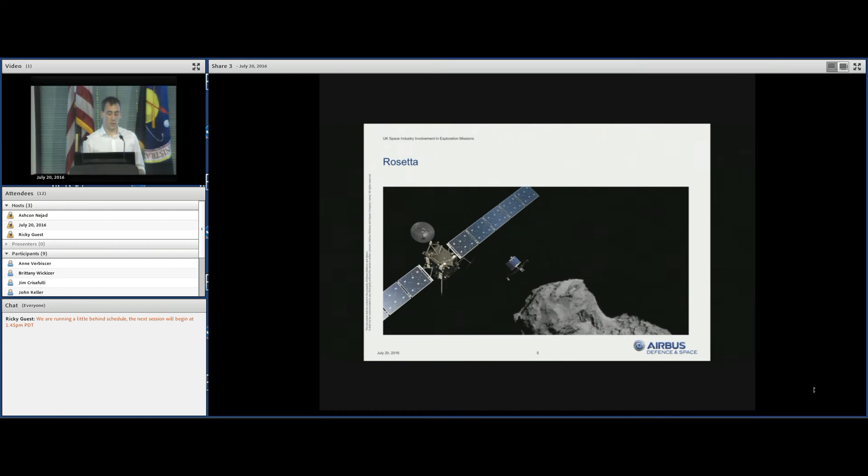So looking at the past, which I define as the things that are kind of currently in orbit at the minute, the UK had some involvement in the Rosetta mission, so we provided the propulsion structure and thermal subsystems for that. We also provided similar elements to the Venus Express mission and the Mars Express mission.

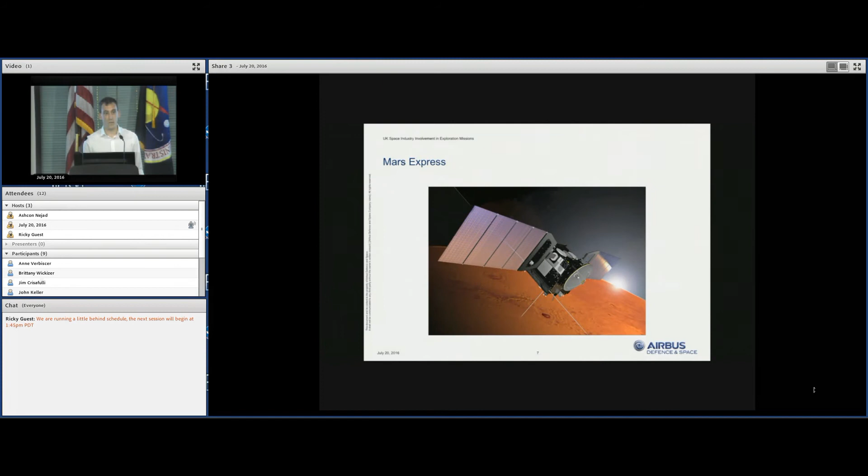For Mars Express, we also provided the Beagle 2 lander. Ultimately, this lander was unsuccessful. One of the solar panels didn't deploy, so it couldn't transmit back to the orbiting spacecraft. But what it did allow the UK to do was to learn a lot about the Martian surface and the Martian atmosphere.

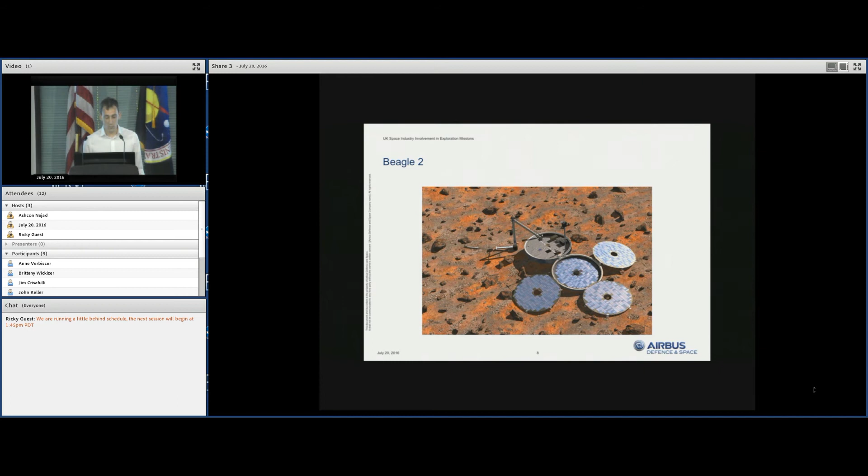So now moving on to the present, so things that are kind of in development at the minute. With all the information and knowledge that we gained from Beagle 2, we applied that in the UK, and that allowed us to take a really leading role in the development of the ExoMars rover vehicle.

So Airbus DS UK is the prime contractor for this. ExoMars itself is a two-mission program that's a collaboration between ESA and Russia. There's an orbiter and a descent demonstrator that's going to arrive at Mars in October. They've already been launched. And the rover vehicle will launch in 2020, arrive at Mars in 2021.

Its mission is to search for biomarkers beneath the Martian surface. And to do that, it's going to have a 321 Sol nominal mission. And it'll have quite a sophisticated autonomous navigation system on board it that's going to allow it to traverse up to 100 meters per Sol and give it over that 321 Sol mission about 4 kilometers total travel.

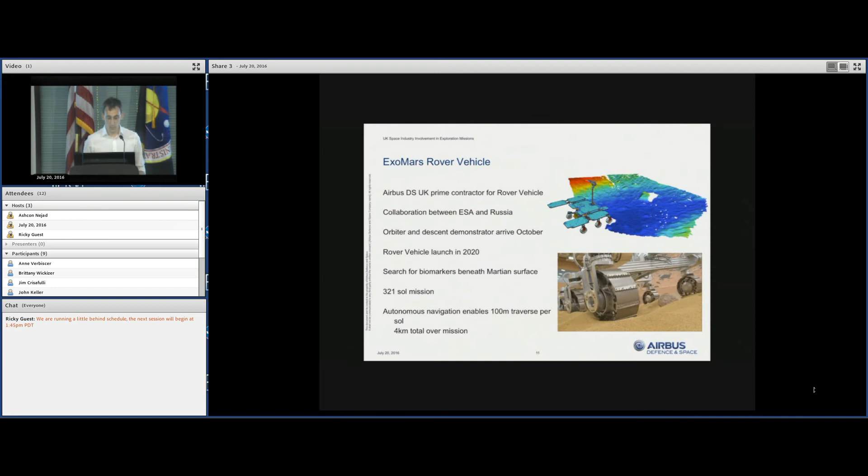In terms of the payload, it's going to carry a drill so that it can collect samples from up to 2 meters below the surface, and there'll be a variety of external payloads that will allow it to identify suitable sampling locations and then characterize those before we take the samples. And then there's also going to be quite a sophisticated onboard sample analysis package as well.

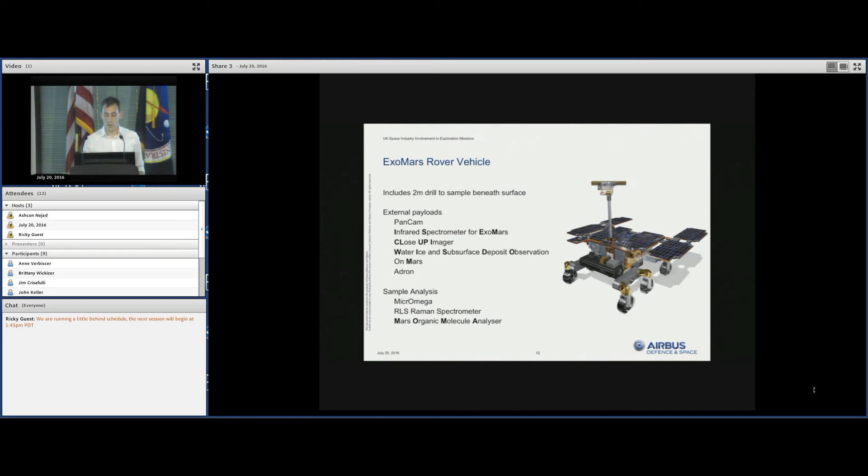We're also involved in ProSPA, which James talked about earlier on a little bit. So this is one of the ESA contributions to the Russian Luna Resurs mission, going to launch in 2021 to the Lunar South Pole region.

There's going to be samples collected, again, by a drill, and then ProSPA is the sample analysis package for that. It's taken quite a lot of heritage from the Philae lander. And the development of this is led from the UK again by the Open University, but with contributions coming from RAL, also in the UK, and Airbus DS UK.

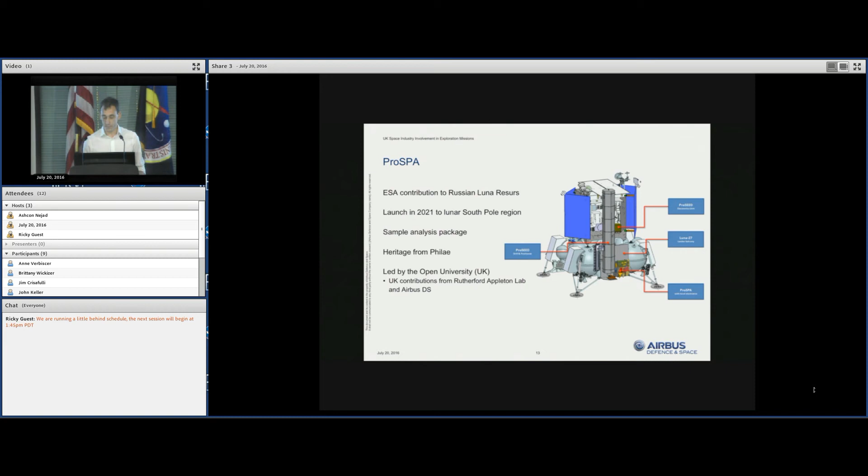Now looking further towards the future, but sticking initially with the lunar theme. This is another thing that James spoke about in his presentation earlier, the Lunar Volatiles Prospector mission, which we've studied again in the UK.

This is a rover vehicle going to explore the permanently shaded regions of the lunar South Pole. It'll have a 1 to 2 year mission lifetime, and periodically it will traverse into these permanently shaded regions, spend about 8 hours in darkness at a time, collect samples from between 0.5 meter and 1 meter depth, and analyze them with an onboard sample analysis package. It'll also collect samples from slightly deeper when not in the permanently shaded regions, and do more sophisticated analysis with the additional power.

This rover is planned to be teleoperated from Earth. James touched on this previously, but we also performed some tests involving Tim Peake on teleoperation of Martian rovers, applicable to other rovers on the Moon too, in our Mars yard in Stevenage.

We've also performed quite a number of other field trials involving rovers. Under the SAFER program, we took one of our rover platforms out to the Atacama Desert in Chile and performed a mock Mars mission, roving around the surface, identifying locations to sample, acquiring a sample in inverted commas, and then analyzing it. The rover was out in Chile, but the operations were performed in Oxford in the UK.

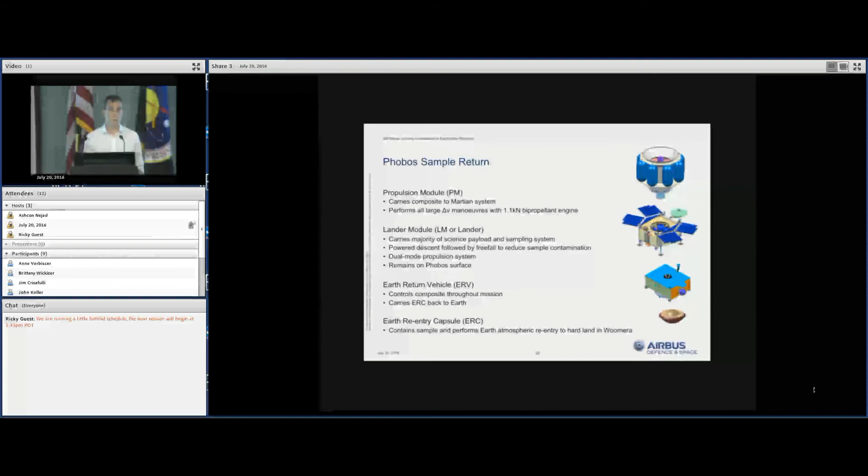The mission consists of a 4-module spacecraft. The first module would be a propulsion module, which would carry us all the way to Phobos, with a European 1.1 kilonewton thrust bipropellant engine on board that would perform all the large delta V maneuvers. We'd then have a lander module on top of that that would carry the majority of the science payload and also the sampling system.

It would perform a powered descent down to the surface before a free fall of around 50 meters to limit the contamination.

Once we've acquired the sample, this would remain on the Phobos surface. The Earth return vehicle would sit on top of this, and this is where the real intelligence of the mission lies. This is the thing that would control the composite throughout the mission, and it would carry the Earth re-entry capsule all the way back to Earth after it's ascended from the surface. The Earth re-entry capsule then does pretty much what it says on the tin, contains the sample inside it, and allows it to re-enter the atmosphere before a hard landing in Woomera, Australia.

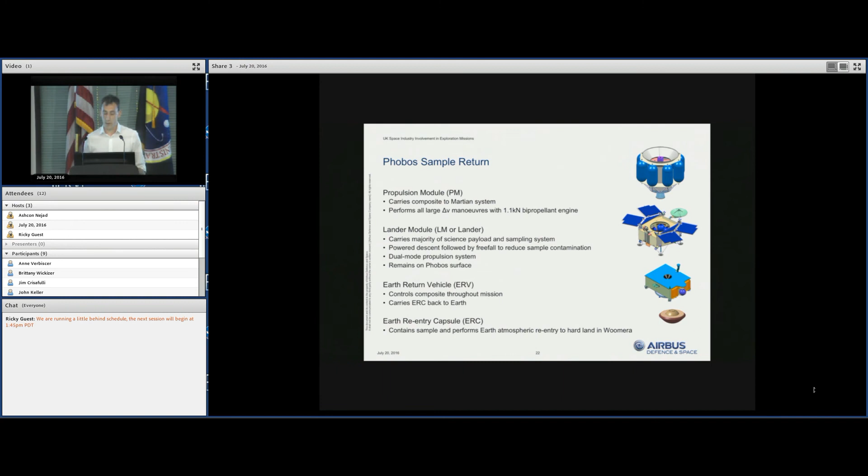In support of the Phobos Sample Return Project, we've got a number of technology development activities underway in Europe that the UK is heavily involved in.

The first of those is the development of the landing gear system. It's a really crucial subsystem for the mission, as it's got to ensure the safety of the mission, both during the touchdown phases and during the on-surface sampling activity phases. It's being led by Sener, a company in Spain, but Airbus DS UK is providing some system-level support to that activity as well. Phase 1 is currently underway, where we're designing and simulating the landing gear, and Phase 2, where we're going to be performing reduced and full-scale testing in a reduced gravity environment, is going to begin towards the end of this year.

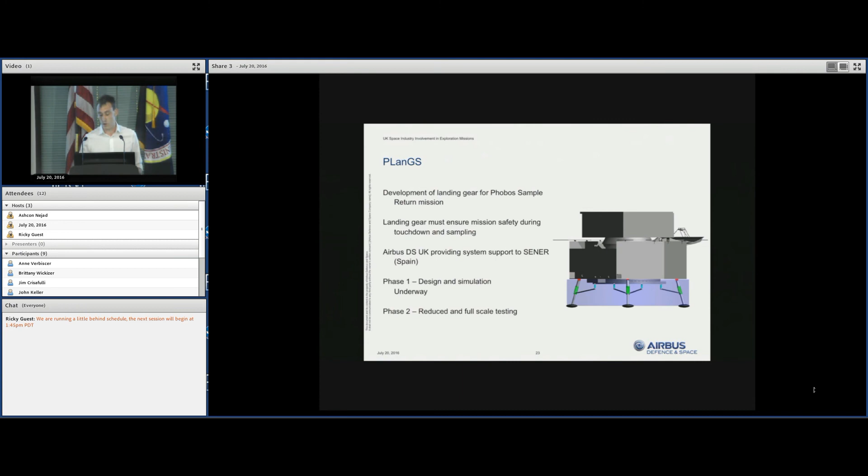In the UK, we're also leading a project called Sampler, which is designing, developing and testing the entire sampling chain for the Phobos sample return mission. Again, we're doing the tests in a reduced gravity environment. Phase 1 is where we've developed a dynamic simulator and then validated that through reduced scale tests. You can see the test setup on the right-hand side where we have a reduced scale lander. It's supported by a spherical air bearing in the middle, and then underneath that it's on a planar air bearing. The tests for those are completed, and fortunately they show quite benign dynamics, which is quite nice. Phase 2 for that, where we're going to be doing a full-scale test of the entire sampling chain, will be beginning again later this year.

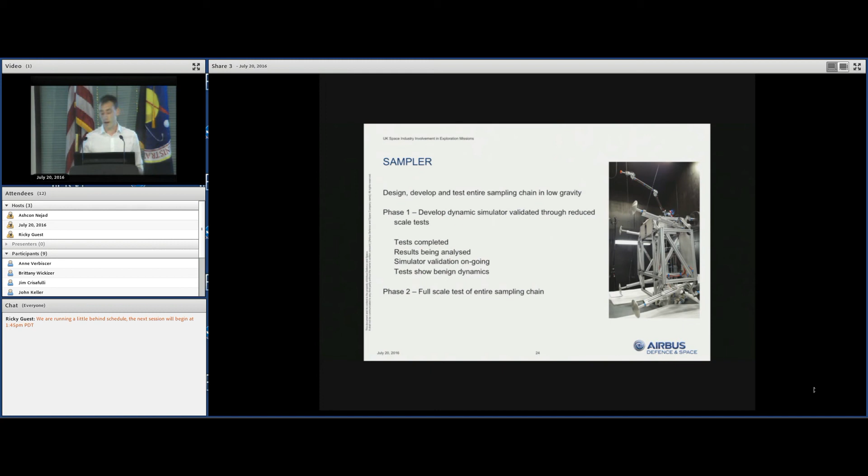I've got a quick video here just showing... is that going to work? Maybe not. No, yeah, if you could just run the video, thank you very much. No, is it going to work? Does the video not work? Okay, fair enough. So essentially this was going to be a video of the test setup, just showing that not that much happens, but that we've done the reduced scale tests.

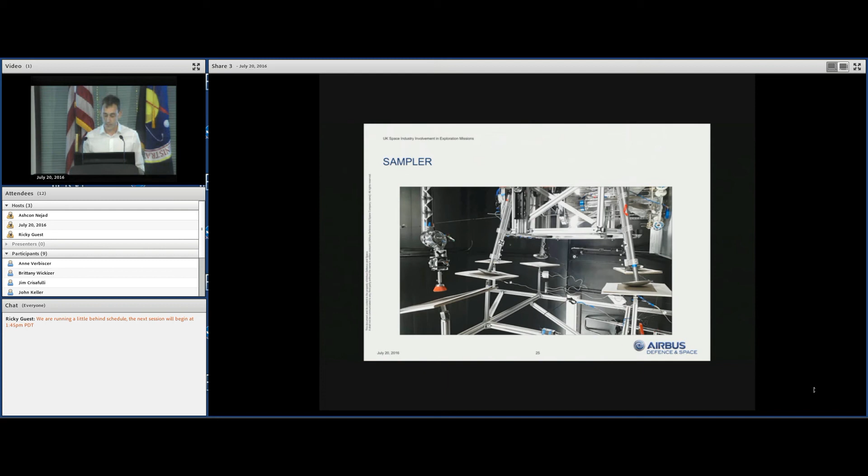Continuing with the theme of the sampling chain, this is a fully UK funded project. All of the other ones are European Space Agency funded, but this is a UK Space Agency funded project to develop a flight representative planetary robotic arm. The only difference between this and a flight arm is that the joint torques have been increased. The advantage of that is that it allows us to operate full-scale payloads with a representative arm in a 1G environment without any of the complications of gravity offloading.

And so we can quite easily rehearse operations with scientists so that they can understand the capabilities of their instruments when mounted on a platform like this.

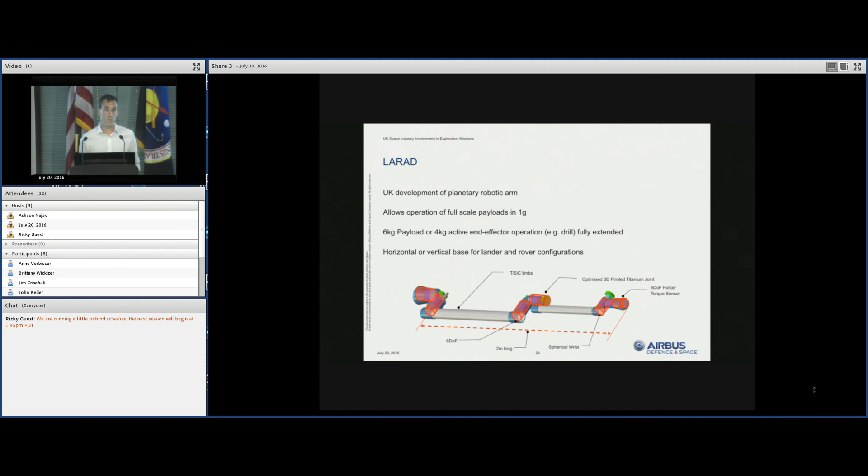Moving slightly further away, this time looking at asteroids, the UK's led the study of an asteroid sample return mission within Europe. We spent about 8 years developing this mission. It consists of a single spacecraft with both a solar electric propulsion and a monopropellant propulsion system on board. It would aim to acquire 100 grams of sample from asteroid 2008 EV5. The way it would do this is by performing a touch and go sampling from the surface with a rotary brush sampling mechanism. This is a really low cost exploration mission that again has quite a lot of relevance to Mars sample return.

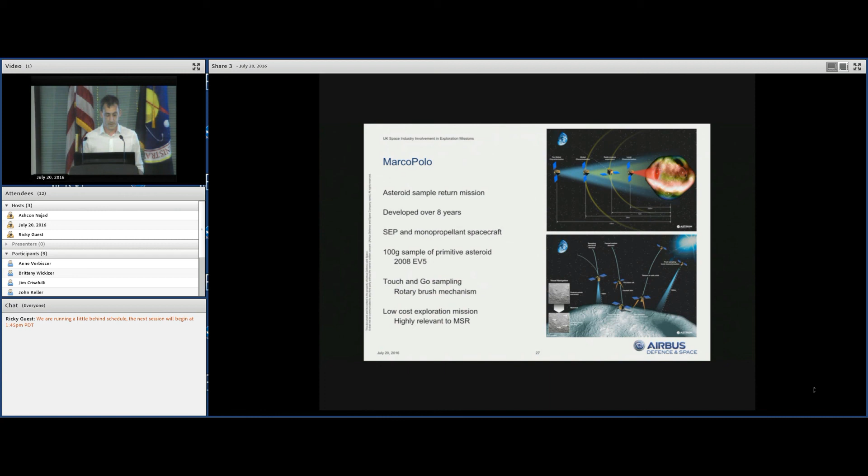The final thing I want to talk about is our Europa Penetrator concept. This would be released from an orbiting spacecraft, or potentially one performing a flyby. It would use the delivery system at the bottom to slow itself down before free-falling toward the surface and impacting at around 300 meters per second. That would generate an impact shock of about 35,000 G, but allow it to bury into the Europan surface by about 3 meters depth.

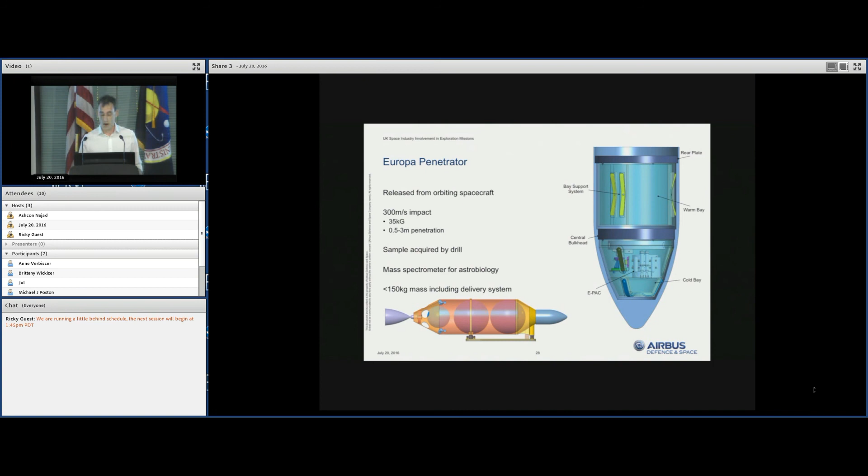Once it's done this, a sample would be acquired by a drill that pokes out from the side and brings it back in. There's a mass spectrometer on board that would perform some astrobiology. I also have a video, but are you able to run this?

Okay, I'll take that as a no. Let's try one final time—are you able to run this video? Okay, if not... no? Okay, there you go.

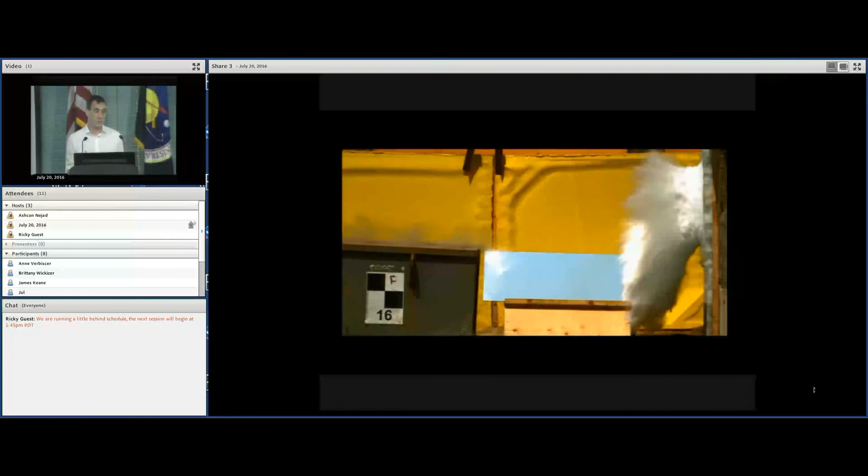What we also performed in the frame of this project was a number of full-scale tests where we took the penetrator, attached it to a rocket sled in South Wales, and fired it at a target of around a ton of ice just to see what the impact dynamics were like. You can see the high-speed video here—it's quite dramatic.

We also performed these tests into a similar size target of sand, as we were aware that Europa is the baseline target for this, but it's applicable to other targets as well, such as Mars, or potentially, as we were discussing yesterday, Phobos.

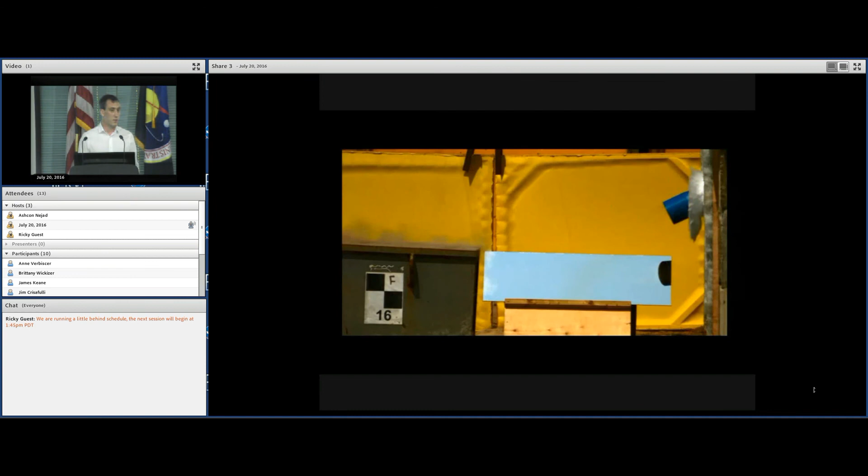So thank you very much for listening, everybody. Hopefully that's given you a very brief overview of exploration-related activities within the UK, and I would welcome any questions.

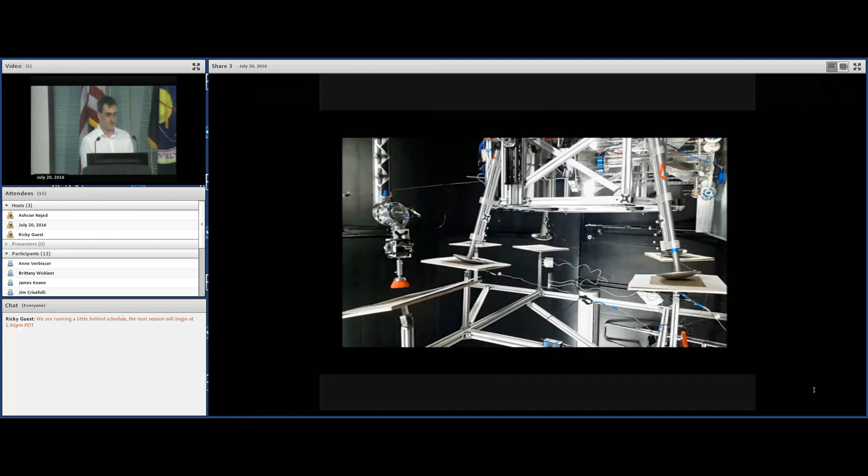So this is the video I wanted to show you. As you can see, not a huge amount happens, but that's a good thing when we're looking at the dynamics during sampling. You can see that as the sampling mechanism on the left-hand side comes down, this front right leg lifts up. Nothing too dramatic, but when you're sampling on the surface of Phobos, that's pretty much what you want.

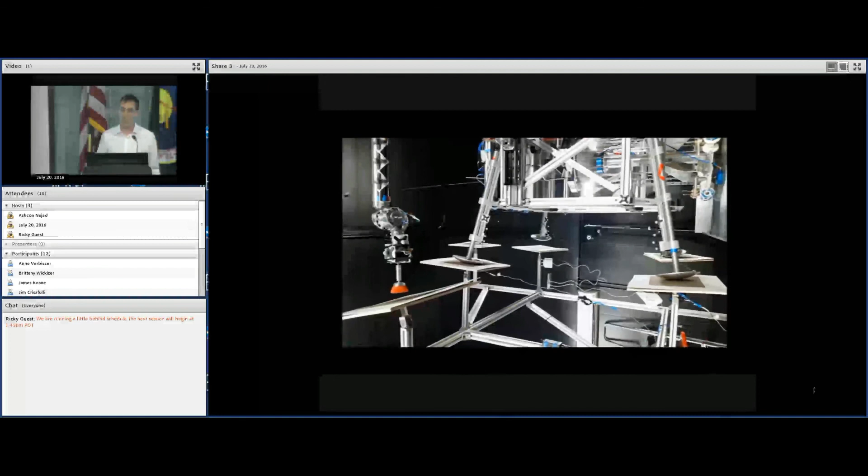So you mentioned using the penetrator on ice and sand—are there thoughts on ice that's mixed with frozen sand as well? I don't think we've specifically studied that at the minute, and we certainly haven't done any tests on that. But in the future, if there are potential missions going to those locations, I think it would be an applicable technology, definitely.

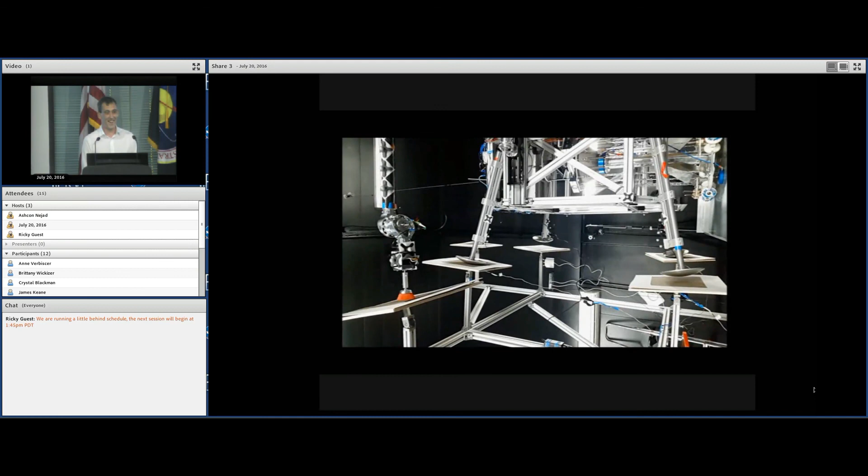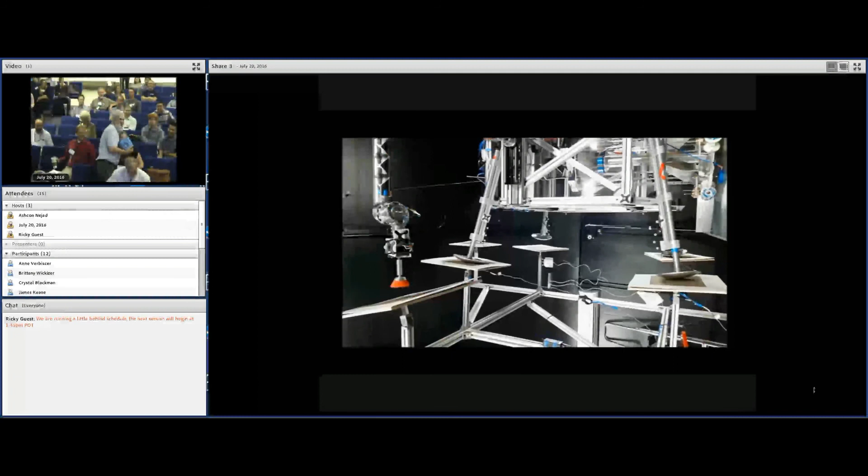One last question, Derek. Derek, turn around. Yeah. I've got a friend here to catch me. Your target for the near-Earth asteroid sample return mission is the same target as OSIRIS-REx. Does it make sense to send two missions to the same asteroid?

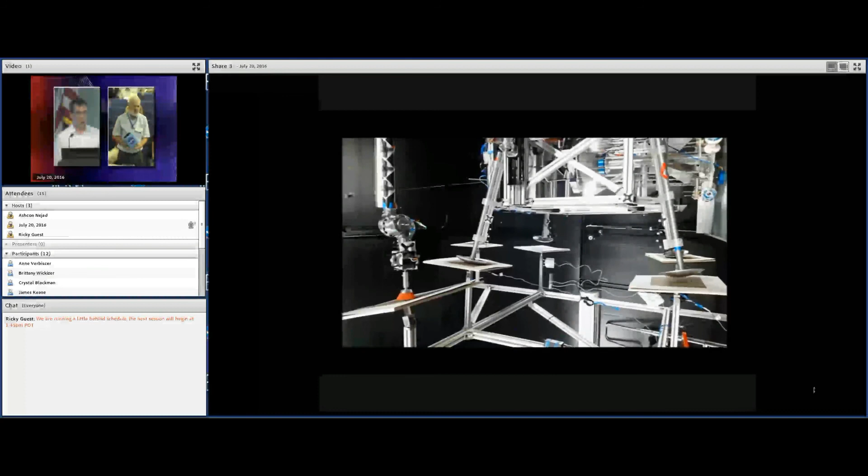This mission was one that was previously being considered by ESA. It was a candidate for the M3 mission calls, where they've actually selected a different one. So as much as we've studied it—we spent 8 years studying it—a different mission has been selected, so that one at the minute is very much on the back shelf. It just tells you that was an easy target.